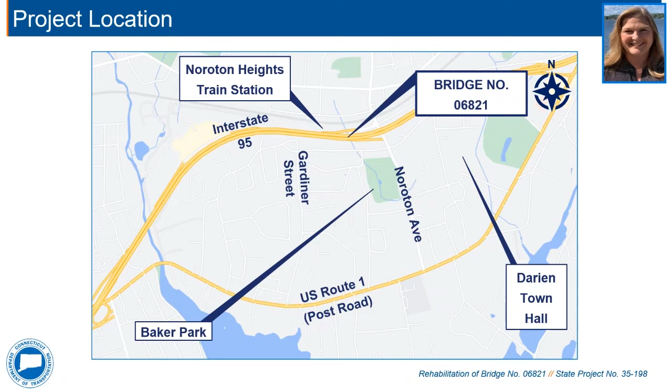Here's an aerial photo of the project location. The structure is located 650 feet west of the I-95 off-ramp and Noroton Avenue. Bridge number 6821 is shown in yellow.

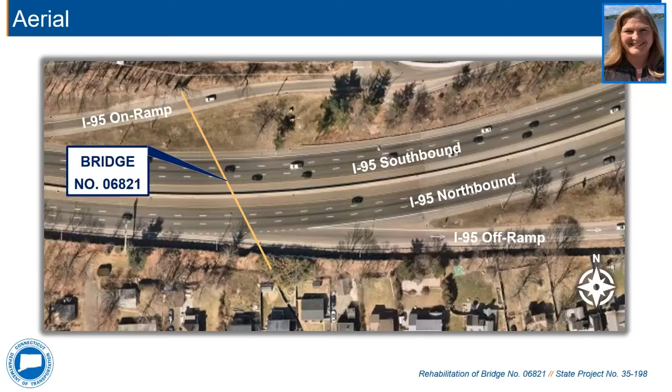During the course of this presentation, you may hear us use terms that aren't necessarily familiar to you. We thought it would be helpful to introduce you to a few.

The Department of Transportation refers to any culvert over 6 feet in diameter as a bridge. For this project, when you hear us referring to this structure as a bridge, please realize that it is technically a culvert or a large pipe.

In this slide, you can see a pipe going under the roadway. The pipe invert is the lowest point on the bottom of the pipe. You can also see a wall built at the end of the drainage pipe. In this case, the wall is at the outlet end of the pipe, so it is called the end wall. The wall at the inlet side of the pipe, which you can't see in this slide, would be called a head wall. The wing walls help retain the embankment adjacent to the culvert, control grade elevations, and can also help prevent scour and erosion.

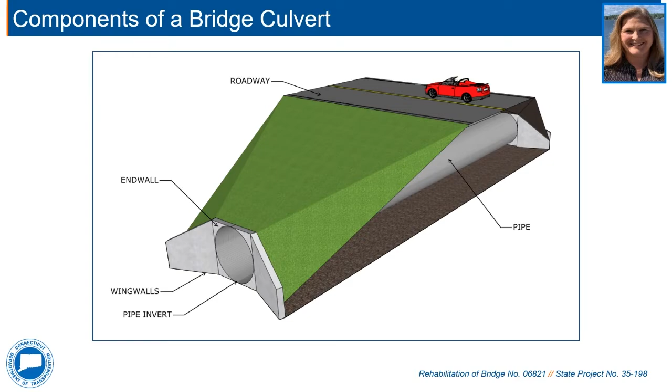Bridge number 6821 was built in 1955 and is a 6 foot wide by 3.7 foot tall asphalt coated corrugated metal pipe arch culvert. This slide shows a photo of the structure taken from the outlet. The culvert is under approximately 4 feet of fill with a sloped embankment at the outlet. The structure is 276 feet long.

The average daily traffic, or ADT, is approximately 123,700 vehicles. This is based on the 2020 CTDOT traffic log.

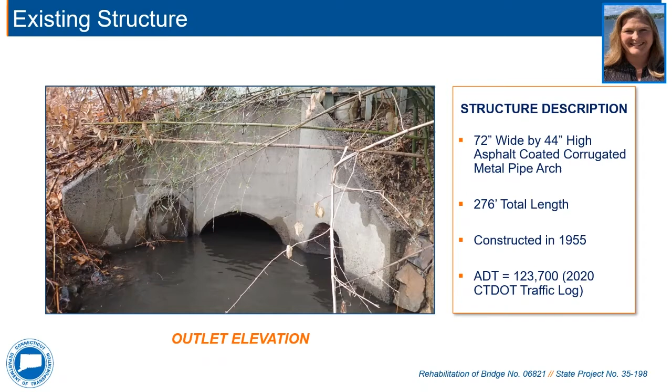This slide shows the project area at street level. In the photo on the left, we are on I-95 southbound looking east. I-95 southbound over the structure consists of the exit 10 on-ramp and 3 travel lanes with the left and right shoulder. The red circle with cones in it is where the culvert crosses under the ramp.

In the photo on the right, we are on I-95 northbound, also looking east. I-95 northbound in this area consists of the exit 10 off-ramp and 3 travel lanes with a left and right shoulder.

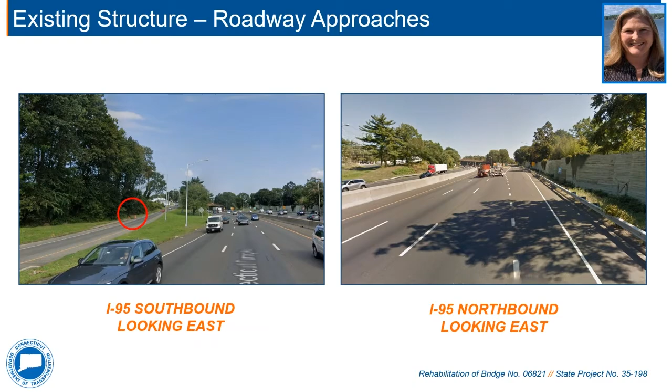The purpose of this project is to address structural deterioration and hydraulic inadequacy. There are 2 photos on the right of the slide. In the upper photo, you can see the section loss in the culvert floor. There is section loss at the invert of up to 5 feet long by 18 inches wide, which is undermining the culvert. There are several areas where the barrel sections have separated, resulting in deformation at the joints. This can be seen in the lower photo.

The culvert itself is also hydraulically inadequate because it does not provide the required amount of freeboard during the 50-year design storm. I will now turn the presentation over to Jennifer Usher from BL Companies, who will explain the proposed project to rehabilitate the culvert.

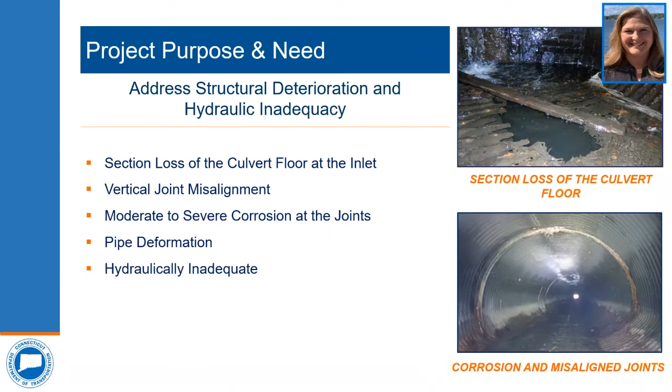Thank you, Susan. BL Companies was retained by the Connecticut Department of Transportation to develop and evaluate potential rehabilitation and replacement alternatives for this structure. Each alternative was assessed on factors such as safety, hydraulic adequacy, cost, and the potential impacts to property owners as well as the traveling public.

After careful consideration, the department decided that the most suitable alternative involved relining the existing structure with what is known as a glass reinforced polymer arch, or GRP.

The GRP liner has a much lower Manning's coefficient, also known as a roughness coefficient, due to its ultra smooth interior. This will result in an increased hydraulic capacity, enabling the structure to actually be able to convey a 50-year design storm.

Additionally, the structure will remain hydraulically adequate if the town opts to replace the upstream stone box culvert with a 60-inch RCP in the future. We will provide a detailed description of how the GRP liner is installed a little bit later in this presentation.

Here's a look at the plan to maintain and protect traffic. Since this rehabilitation does not involve a full replacement or excavation across I-95, all work can be done from either end of the pipe. This will allow for all lanes of traffic, including the ramps, to be maintained throughout construction.

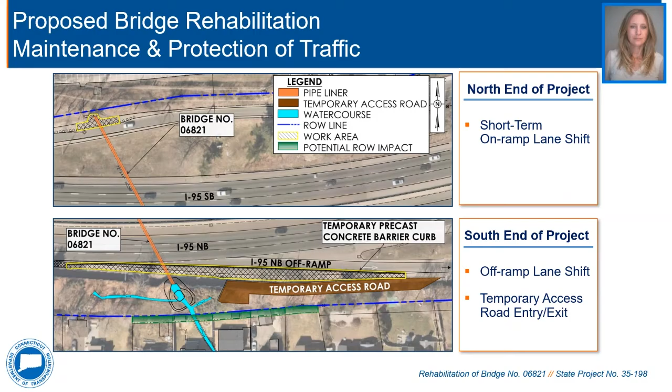This slide shows a closer view of the structure outlet as well as the temporary access road. We are in the infancy stages of design, and impacts to adjacent properties are not entirely known at this time. The green shaded area denotes where we believe temporary easements may be needed to allow the contractor adequate area to complete the rehabilitation.

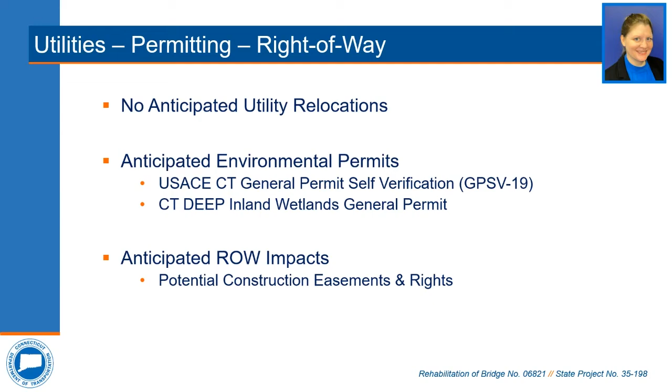My name is Matt Giannakopoulos, and I am a project coordinator with the department's Division of Rights-of-Way. It is our office's responsibility to acquire the property rights needed for transportation projects.

The proposed project design requires the acquisition of property rights, so I'd like to give a brief overview of the department's right-of-way acquisition process. Please keep in mind, though, that the specific impacts are still being fine-tuned and may change as the design progresses.

Any property rights that will be required will be acquired in accordance with Connecticut General Statutes Sections 13A-73 and 13A-98E. Whenever there is federal money used in any aspect of a project, the department must adhere to the Uniform Relocation Assistance and Real Property Acquisition Policies Act of 1970 as amended.

Once the design has moved to the point where we are ready to begin the acquisition process, each affected property owner will receive a formal letter of intent to acquire from our office, along with a property map which depicts the exact property rights to be acquired.

At that point, our office will determine the fair market value of those property rights and use that value to establish an offer of just compensation.

That offer will be sent out to the property owner in writing, and a right-of-way agent will be available to meet with the property owner and explain the project, go over the specific impacts to their property, and explain the state's offer. The property owner will have a reasonable time, typically at least 30 days, to consider the state's offer and enter into negotiations.

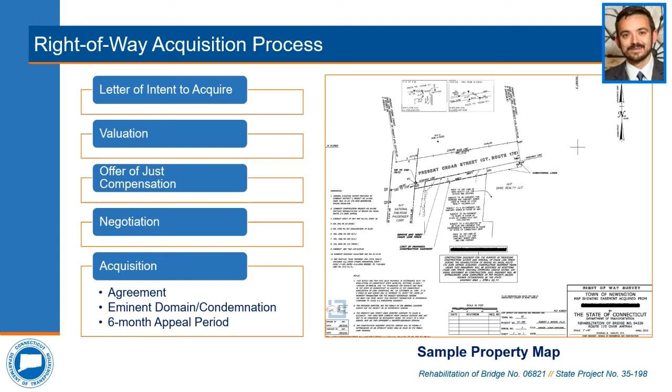At this time, we are anticipating construction to begin in the spring of 2025 and be complete in the fall of that same year. Please note that the schedule is preliminary and is predicated upon the availability of funding.

This concludes the formal presentation portion of tonight's presentation. At this point, I will turn things over to Jennifer Usher of BL Companies, who will be the MC for the question and answer session of tonight's presentation.

This is Mike Woods with BL. Just to add to your response, and I hope everyone can hear me. If we could go back to the plan view, the limits of the noise barrier wall that will be removed during construction are just within the limits of the access road to the culvert. It's not like we've got this enormous section of noise barrier wall being taken down for this project along 95. We are just doing it in the direct vicinity of the culvert and the access road so that we can get down and construct this project.

Thank you, Mike. I appreciate that. Alright, I want to make sure. Okay, there looks to be another question from Mr. Adelman. My second question is, can you please describe the GRP insertion process? Does the glass liner rest on the floor of the old culvert, or is it more centered vertically?

That's a great question. Please feel free, Dave or Mike, to jump in on this. We're both with BL companies and have participated in the preliminary conceptual design for this. So the GRP, what we want to do is actually insert that. We do not want to put it necessarily directly in the middle of the existing pipe because we want to match the inverts as much as possible, basically to not disturb the flow. So you will have a little bit more of it centered, closer to the invert, or the bottom of the pipe. Mike or Dave, do you have anything you want to add to that?

Yeah, Jennifer, I'll add a little bit. I'm David Chichia, BL Companies. So when they start pushing this pipe through, they'll lay down a couple rails first, so it'll be a little bit above the invert, but it won't be raised up to be halfway between the top and bottom. We typically see about a 3 or 4 inch invert increase, but that's for a typical pipe that has a thicker pipe thickness. For this pipe, it might be around the range of maybe 2 or 3 inches above the existing invert.

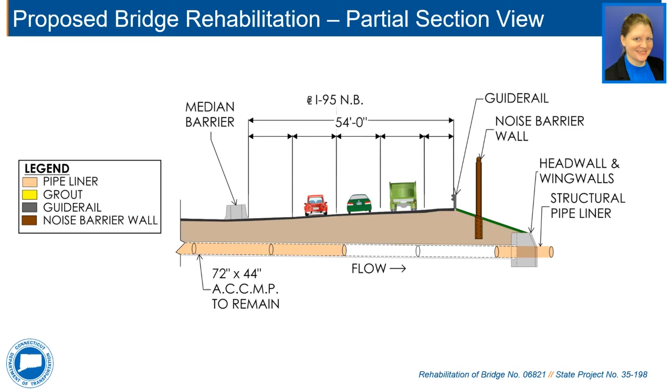Thank you. So the question is, will the construction block the stream? During construction, we will temporarily handle the flows going through that pipe from the junction chamber located on the on-ramp on the north side of the structure, and that will be pumped through the existing pipe. The flows will be pushed back into the stream beyond the limits of the scour hole.

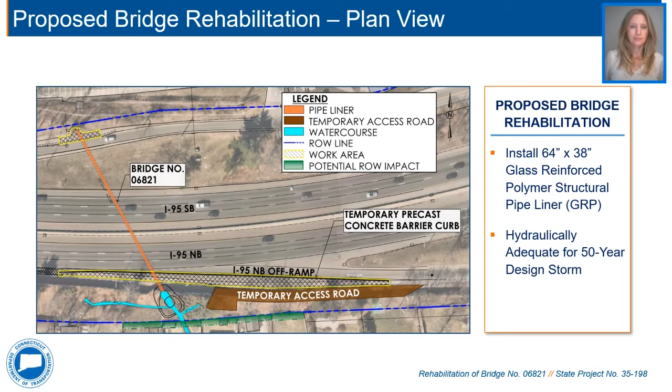Just to add to what Mike said, this is Jennifer Usher with BL Companies. A water handling plan will be established prior to the start of construction. It is anticipated that water will be piped through the existing culvert. However, if during construction a high intensity storm is expected, the contractor will be responsible for clearing that area of any blockages, allowing the existing pipe and waterway to convey the drainage during that storm. Hopefully that answers that person's question. If not, please chime in again, we'll be more than glad to provide additional detail.

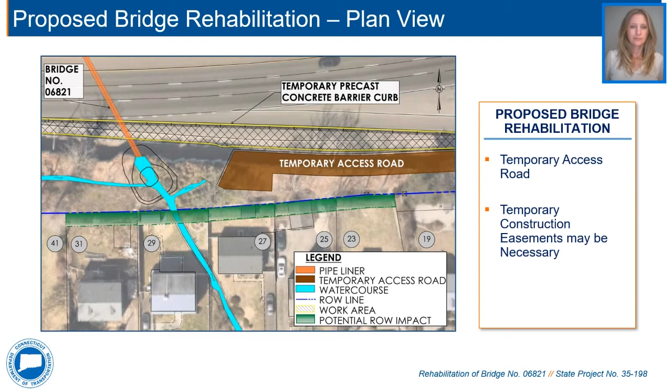So every 2 years, at least, this area will be inspected. And if there are signs of a blowout, or if the town notifies the state there is one, we could adjust the volume of material out there, adding more stone. We could also utilize bigger riprap. The size is a bit more of an issue because there's not much room between that noise wall and the outlet on private property. So we're not going to enlarge it toward the south to affect private property. We might use some bulkier stones along that edge, and widen to the east and west to distribute the forces and prevent more damage. So yes, there is an ability to modify, change, and improve it if necessary. Thank you again, David.

I appreciate that. Let's see. It looks like Jim Cameron is chiming in again, with RTM District 4, noting that the pipe under the railroad tracks may be owned by CTDOT, which owns the tracks. I believe the tracks are actually owned by the railroad itself, not CTDOT. But nonetheless, he makes a good point, saying that Town Public Works Director Ed Gentile has not told us the railroad pipe is the town's, and asking if we can back check our information. I think that's certainly feasible for us to do. Jim, if you wouldn't mind providing your email address or phone number, once we check those, we can provide you with that information as confirmation. Thank you very much.

Appreciate that. We have another question coming in, from Mr. Oben, asking if Matt believes any property acquisition will be required for this project.

Matt, I'm going to take a stab at this. Matt Giannakopoulos is with the CTDOT right-of-way division, and he would look to the design team to see if any acquisitions or easements are needed for construction. As part of that design team, I'll hazard a guess, Mr. Oben: as described in the presentation in February and again this evening, the project is in early design phases, and there is potential for temporary construction easements needed. I believe we've identified 5 properties that could potentially need those easements to accommodate construction. As noted in Matt's presentation, anything required for construction would be subject to compensation, negotiated at that time. As we progress further into design, we'll hopefully identify the exact impacts. We understand this area is very sensitive, with residential properties we're abutting. We want to be good neighbors as the state of Connecticut, so we'll look for ways to mitigate, minimize, or hopefully entirely avoid impacts. That is certainly our goal with this project.